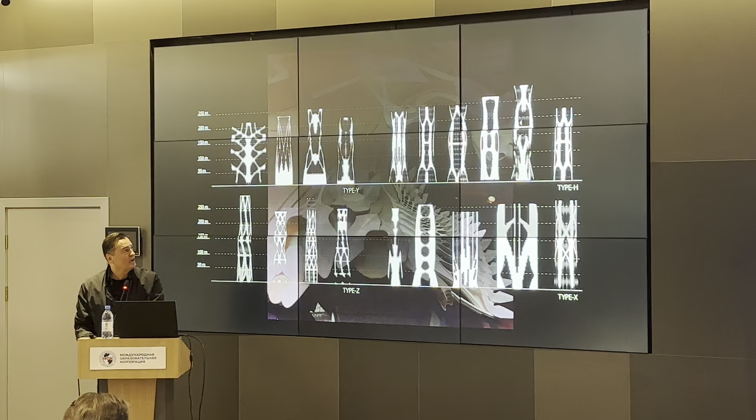Using very different principles of tectonics, you can show tensile structures, grid structural framing networks, shell structures, conic developable surfaces, etc. It's quite intricate. If you go into detail, they're all quite different, yet they're harmonized. They operate in parallel, observe each other, and follow a single paradigm.

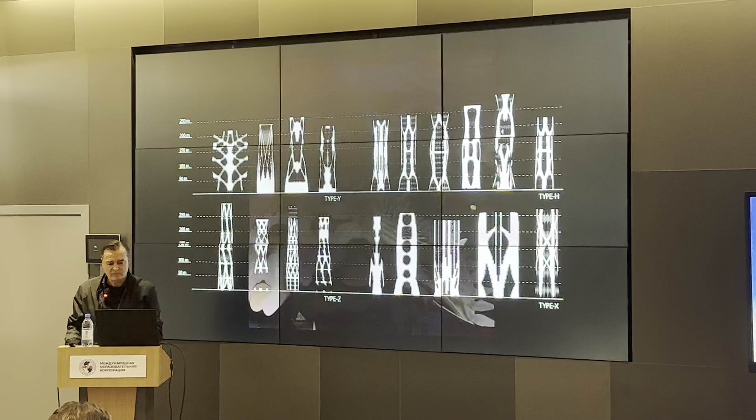That's my paradigm of the city development. Okay, this is another one.

If you do topology optimization, you get an enormous amount of variety, and there are different tools. There are tools which start solid, which maybe you can translate into concrete, and those which start with linear elements, which you can translate into timber or steel. Even within this kind of optimization process, there are different packages and different sets of parameters. So there's an enormous variety.

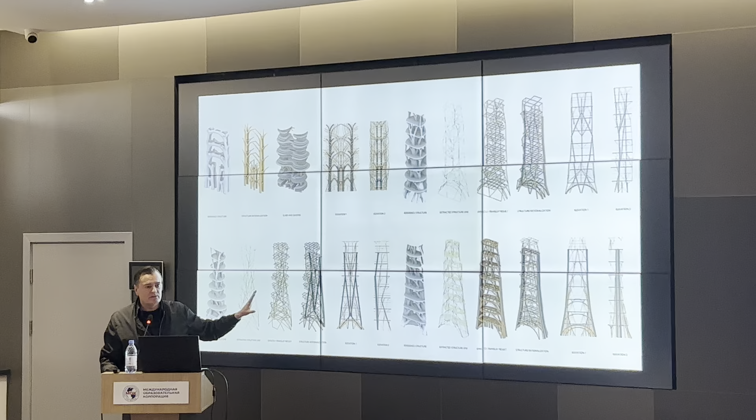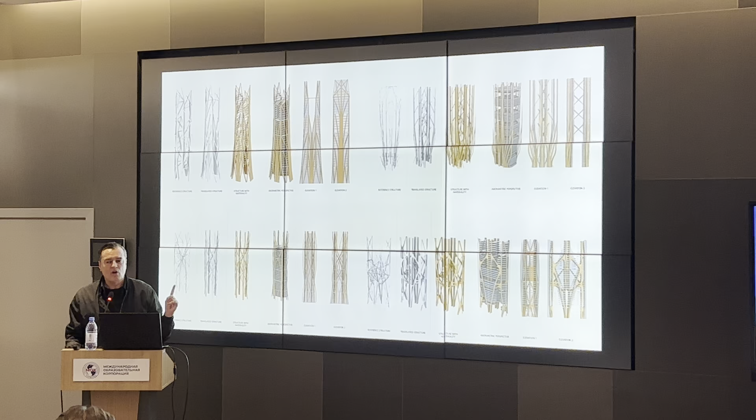If you compare this to traditional structural thinking, where you have three solutions, here you have three hundred solutions, which are distinct, but they're all optimized. Because what's the point of getting it down to the last 5%? You have lots of other things to think about: expression, the kind of spaces, the kind of materiality.

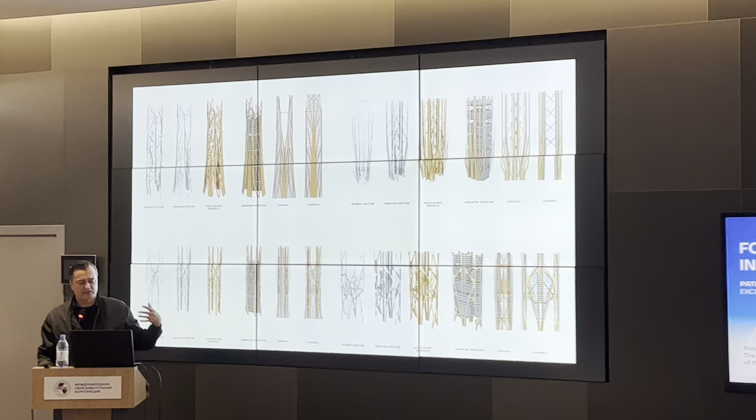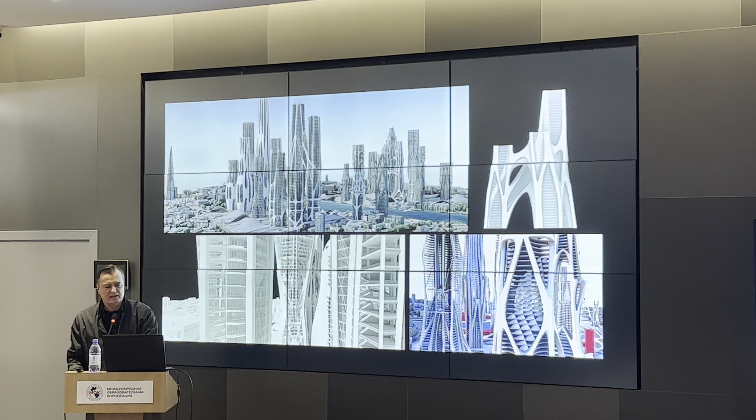So these are kind of projects we're doing with students all over London, using this variety. All of them have exoskeletons, atria, a lot of bridges. This is something you can do if you come to work with me as a student.

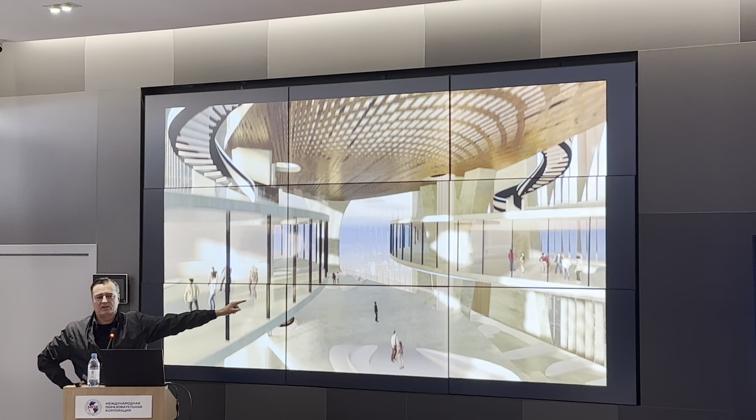The whole city detailed to this level in one year. That's of course very long, because in the office we have to do this in two months.

But what's very important for us as a firm is that we've done shells and tensile structures, parametric urbanism, topology optimization, tectonism, various ways of advancing, always using university, using this kind of post-professional degree.

I've been teaching for 30 years at the AA, developing these themes. Before we did our first exoskeleton, we had 10 years of research at the school. Before we did our first shell and tensile structure, we had 10 years of research in Vienna and AA, etc. The same happens now with the metaverse, happens with everything.

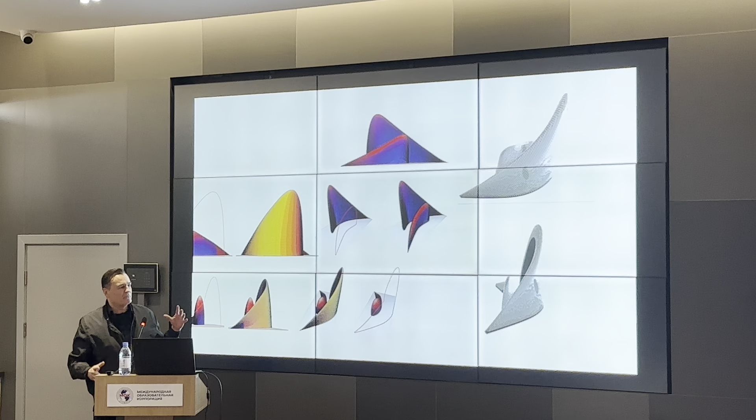So environmental logic, we started early on. When you do the aspects of sustainability, which is about passive systems, for instance shading, which is expressed on the outside, this starts with massing and volume configuration, self-shading, etc.

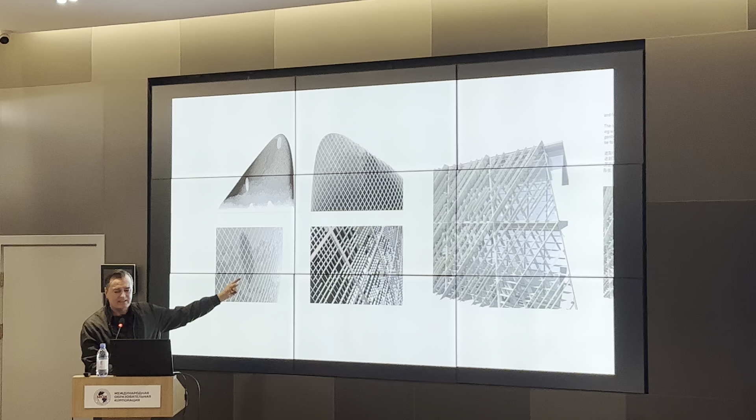You exploit sun exposure, and you can run a sun exposure map and script the geometry translation directly onto this. So you can translate degree of sun exposure into density of louvering. And of course there could be 100 different systems.

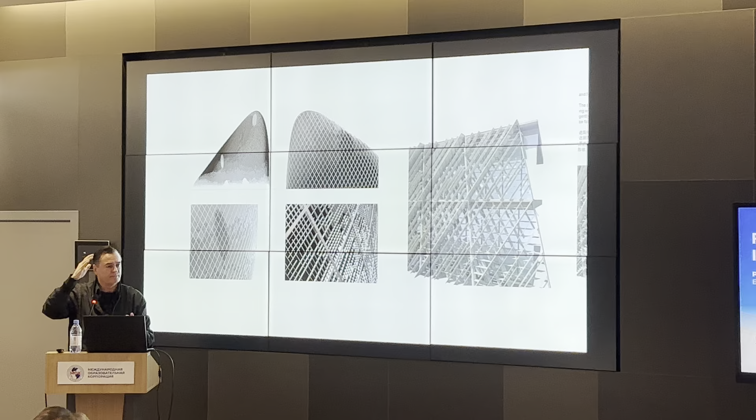And you can run them, and then you put another building in, self-shading, these things thin out. And when you look at the building, you know there must be something here. On an overcast day, you can see where southwest, east, north. So there's a lot of things.

So this is a project we're doing, the Central Bank of Iraq on the Tigris. Here we try to combine the double constraint structure and shading, brise-soleil, in these vertical elements.

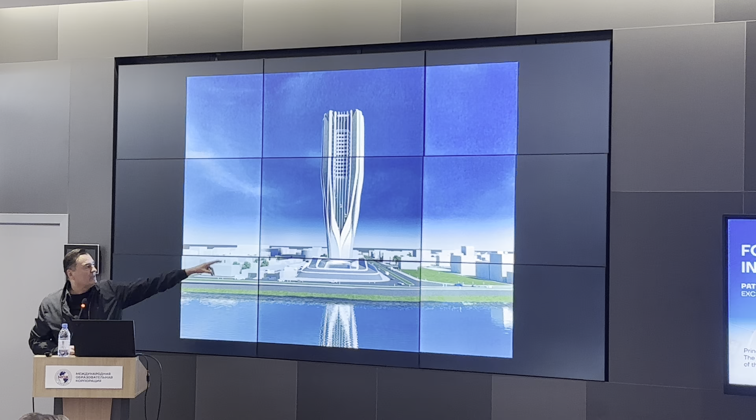There's a big atrium in front, so you move up, you can see the city, and you interconnect these in levels. But what's beautiful is that it ties up — there's a gold wall at the bottom, and then you have the offices, and then there's a podium where the atrium, the light and the path connect up with the atrium. So it's also this kind of articulation of a path.

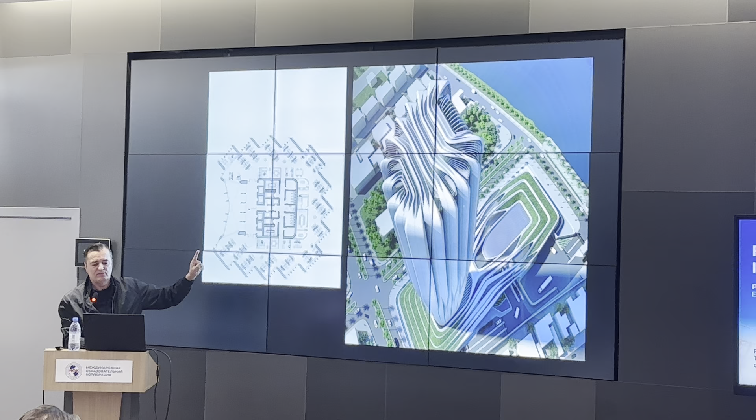Wayfinding — you can see how this looks very different from different sides. So it becomes like a sundial, and it's also in the Middle East very hot, so you can cut out the heat.

But there's also no justification to have a tower symmetrical all around. It's irrational, but it was done before. We've said it's wrong, it's taboo. We still do it sometimes, I'm sorry to say. But it shouldn't — it should be taboo.

Some people decide to put louvers on their facades. How are they going to do it? They wrap it all on all sides. It's insane. Instead, it needs to be optimized and differentiated.

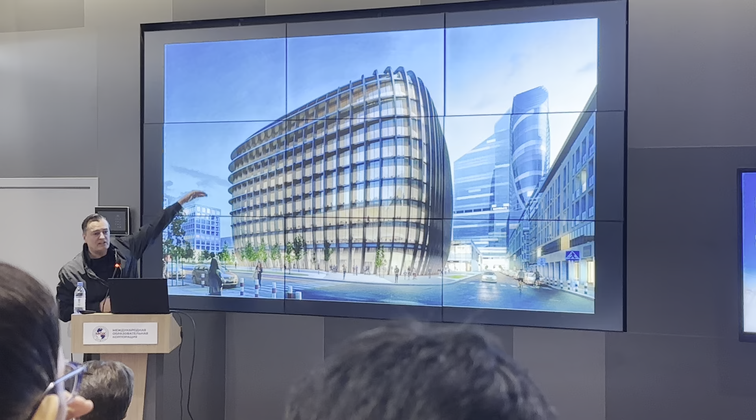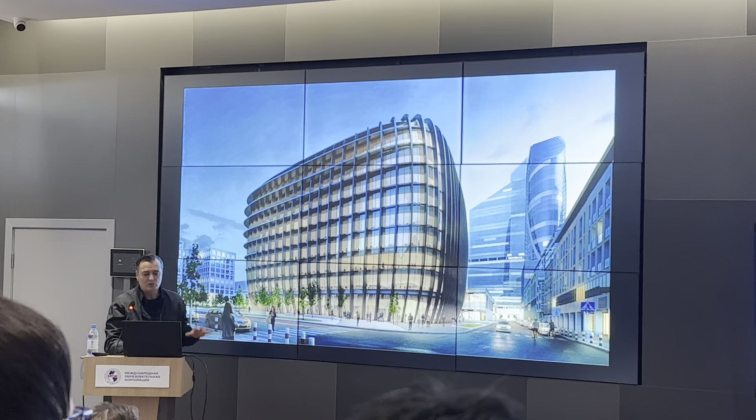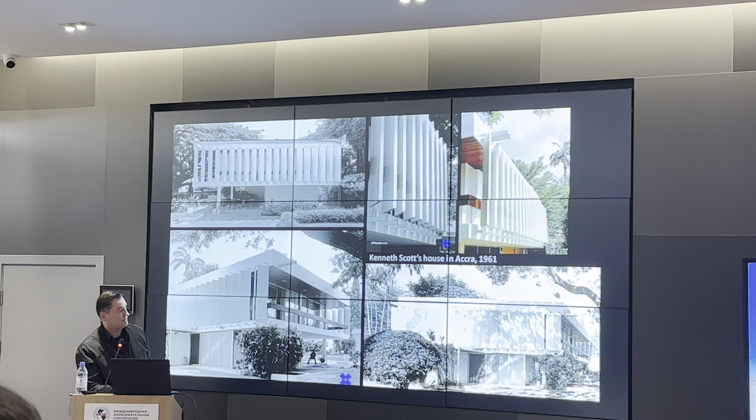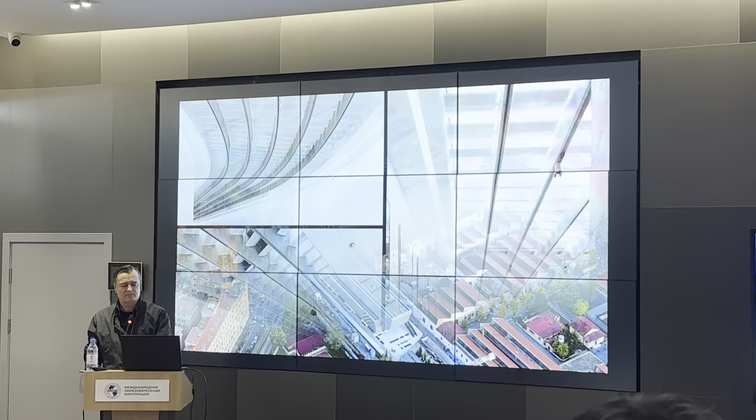And you sense it on the inside—you know where you are. This is a building just finished in Prague. These are our projects where we're learning to work heavily with deep relief, with various types of brise-soleil. There are multiple levels—there's the main ribs, there's the secondary, and then there's a grill, which is also completely directional. So in some spaces, when you face north, you can look out and see the sky, but there's never direct light coming in through the daylight kind of way.

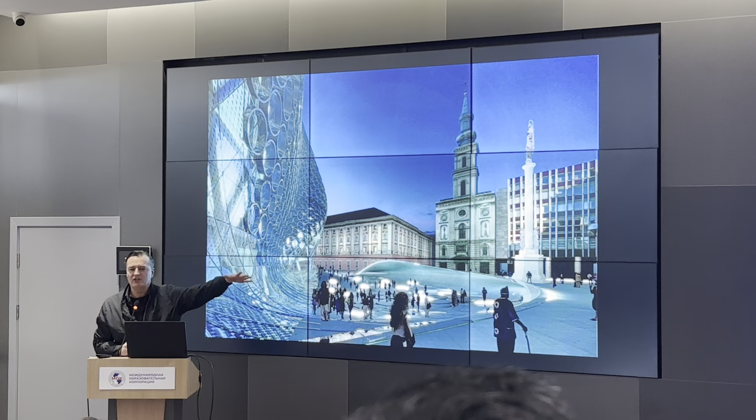This is a proposal we did for Budapest, with this kind of shading, densification, and degrees of extrusion. Then there are also formal affiliations—you're framing a surface with a backdrop, so you can make it formally similar, because you have many ways of doing louvers, many ways of doing lights.

So they could also share and participate in generating a space. It's not pure engineering, it's engineering as a constraint, driving and then composing a space. There's a big difference—engineering is our input, and we are orchestrating engineering options into a composition. The more exposed the facade becomes to the exterior, the more it shadows out to the interior, but this also tells you public versus private. So there's information—you can use these details to characterize spaces.

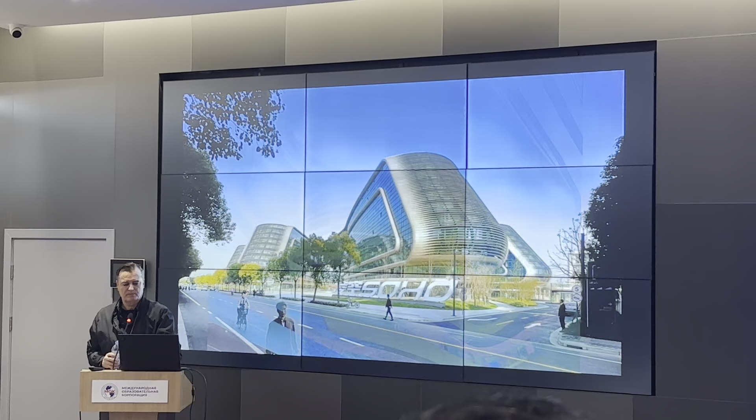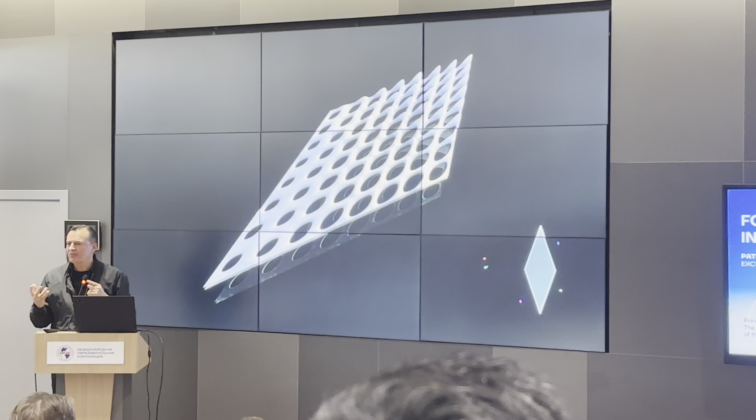This is a simple idea of system differentiation—never repeat, but self-similar and parametric variability within a parametric element, parametric components. This is the default: if you do a system, which parameters do you give it? Which variability do you give it? What is it driving? What is it relating to? The default is never repetition—it's always variation. It's very rarely that repetition is the optimal solution.

Particularly if you have a curved building, for sun exposure it gradually changes as it decreases. Undercut is different from exposure, etc. These are very old projects—we've built this.

And you can express larger open spaces to the exterior, so there's legibility to the exterior as well, and integrating podium and tower potentially—tensor elements.

There are many variations, studies, and options of this. Shell structures, super high performance concrete, mushroom shells, and clear foil as a facade - you open it with a zipper. It's a house I was designing for myself in China, but it never happened.

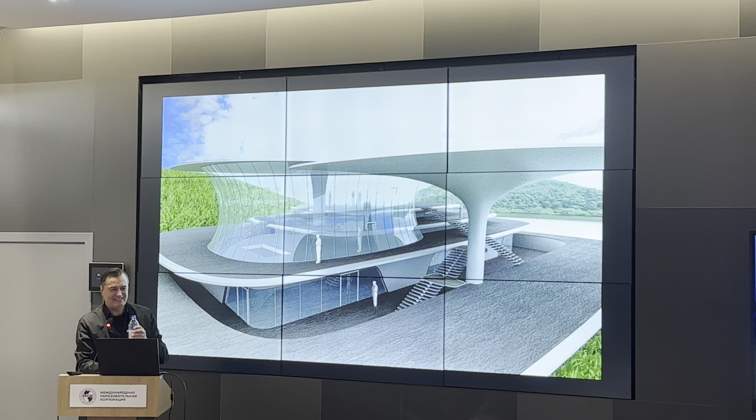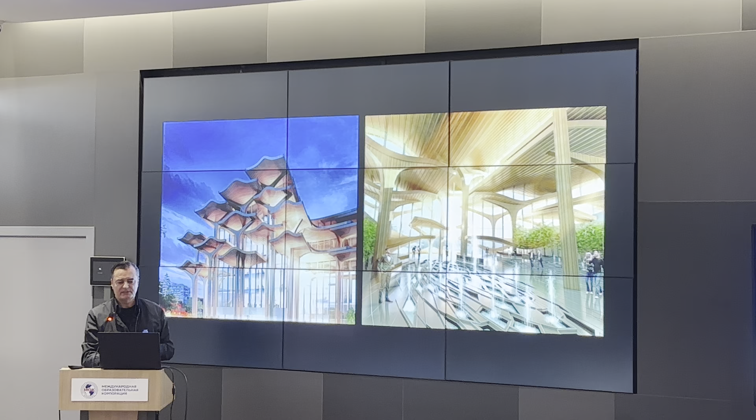Timber, roof overhangs as well, for climatic, tropical climates. You can also affiliate to traditional tectonics of the region. So some of the Middle Eastern projects look Middle Eastern - climatic, but also typology, morphology, regional materials. Some of the Chinese projects again have a kind of 21st century China character - I was asked, how about this?

There's something you can learn from those regions, their features. But also, not only that you have relief and depth - this is just light and shadow studies, how a building's character and facade could be very different at different times of the day. It's the same building.

All this, which I'm talking about, is observer dependence - parameters based on the observer's position. So you can also do this when you want, from different perspectives it appears differently. Look at what happens - it's only the camera changing, and it shifts from a grid to a circle packing.

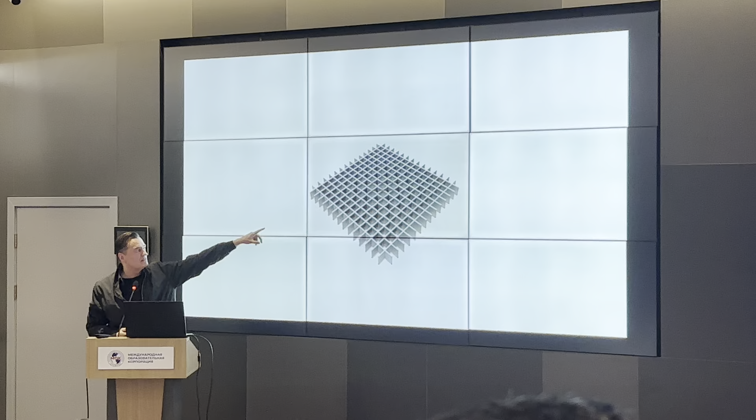It's the same architecture, depending on where you look at it. You can affiliate, you can make something homogeneous or differentiated, affiliated to something else on the other side. So it looks either like a wave, circle packing, or grid, depending on point of view. But this is the opposite - it seems to talk to you as circles, but then the circles disappear into a grid, into a wave. So that's another topic, I'm not going too deep into this, but these are called phenomenology.

Investigating the morphology with respect to perspectival positions. Also some kind of effects like this - the entrance is here, where we accumulate depth in the facade.

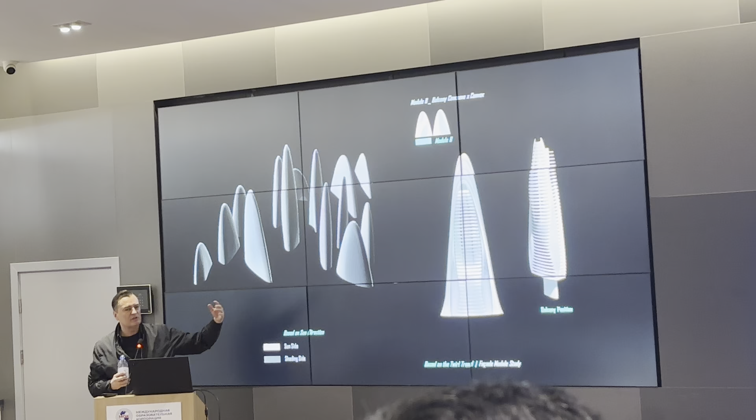This is student work, so again, this is a team in one year - they can generate, use balconies as shading and/or louvers, etc., including self-shading integrated into the design. And you can see the shift also from horizontal to vertical, like was discussed.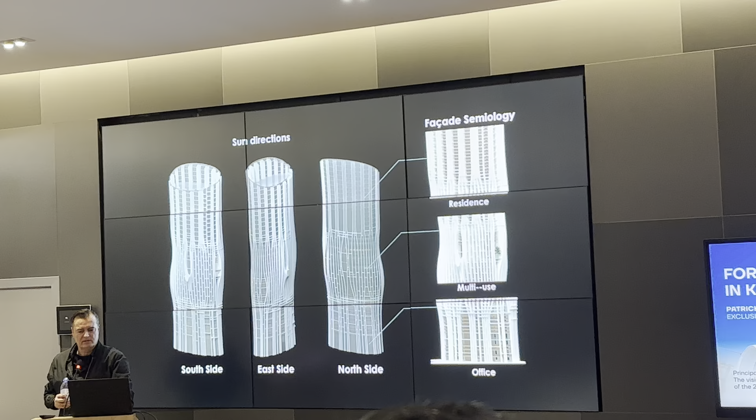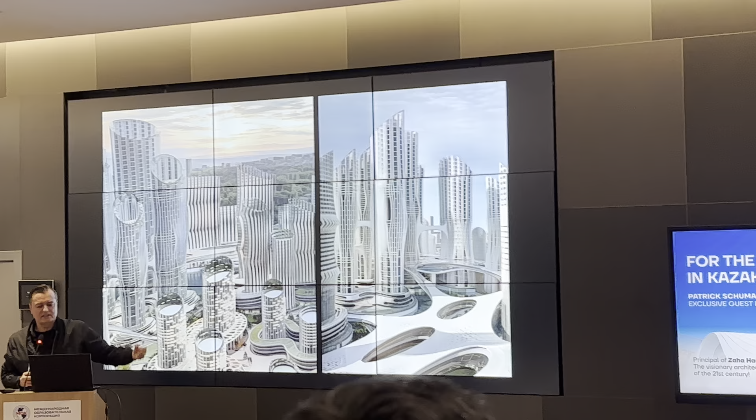Another team - shallow to deep depending on site, sun exposure translated into geometry. So you get these kinds of visions for a dense urban cluster.

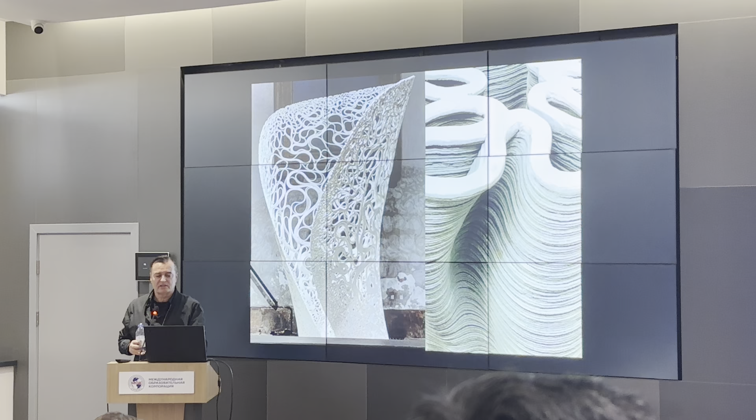And in Stuttgart they're doing a lot of carbon fiber weaving and threading, and you get these wonderful different experimental structures. You use inflation and then robotic carbon fiber laying cells. This is wonderful stuff - this is not only us, this is also connected to ex-students, etc.

Aggregation of elements, minimal surfaces, but fabricating with kind of aggregating small elements, super thin elements. This is our own material, a super thin shell, robotically folded. So this curved folding - the robot creases and then folds these elements, which then aggregate into a super thin, millimeter-scale aluminum shell. We showed it at the Venice Biennale.

And then everything becomes part of an ornament as well. So we don't mind the bolting, and they also enhance the kind of richness of the surface.

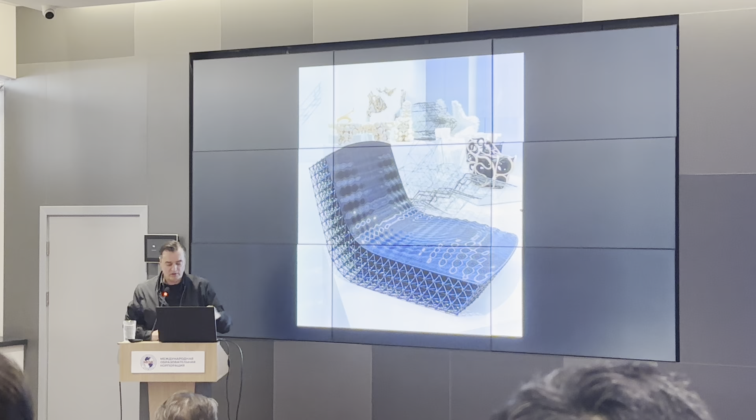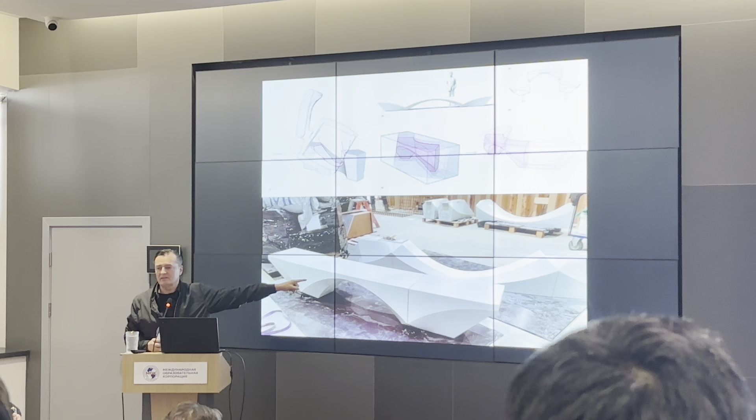3D printing - we have an exhibition at our gallery where we're also hosting lots of young talent and experimental work in tensile structures, hot wire cutting. So if you do these molds with milling the polystyrene versus hot wire cutting, it's about 30 times faster with hot wire cutting.

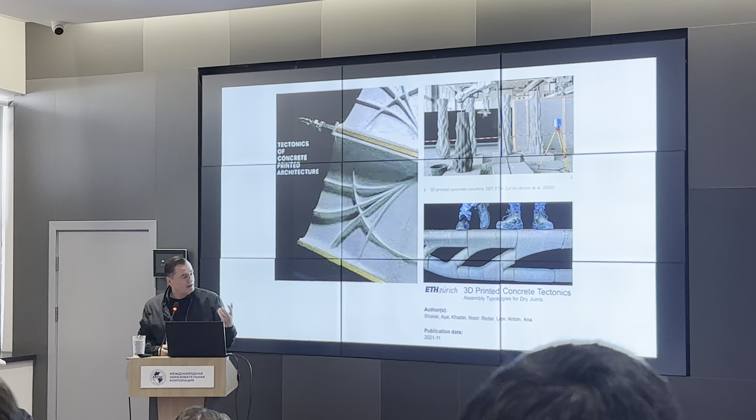But then you have to live with these geometries, though they're actually quite lovely - all kinds of ruled surfaces. And there are others studying this, kind of digital tectonics, 3D printed tectonics, etc.

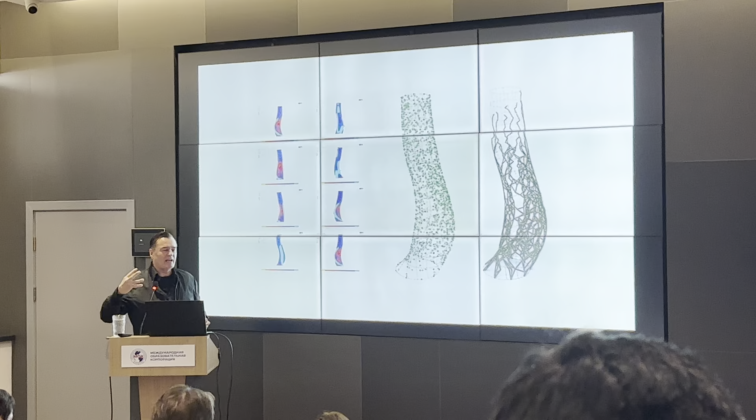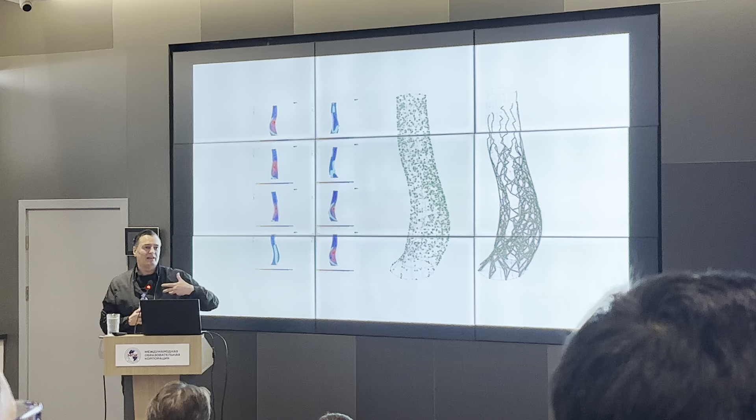So the enhanced tectonism for me is that it's not only technical - I'm emphasizing the communication aspect. You can see and learn what's happening, the natural differentiation of the structure. You look out that it's conspicuous enough, you look out for legibility, you look out for orchestrating the different systems to have both similarity and contrast.